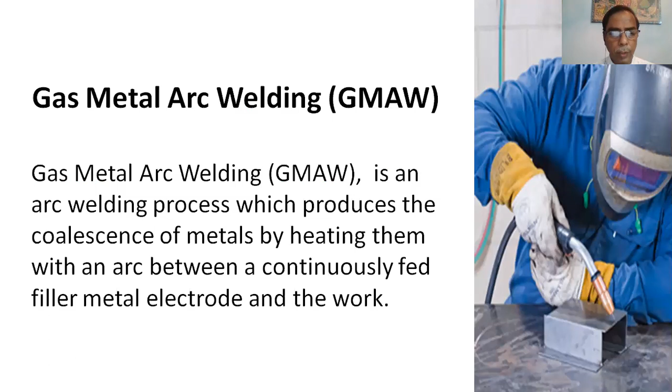Today is my sixth lecture, Gas Metal Arc Welding, GMAW. GMAW is an arc welding process which produces coalescence of metals by heating them with an arc between a continuously fed filler metal electrode and the work.

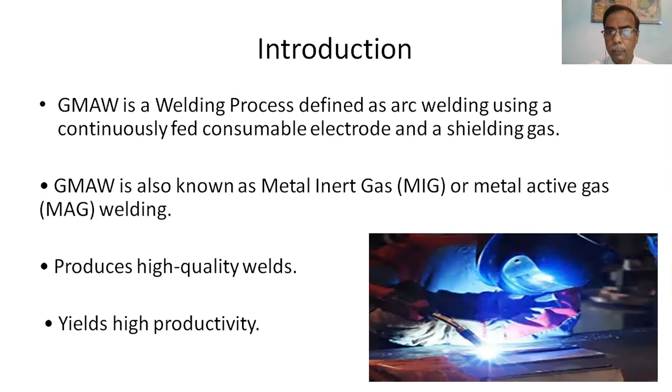Introduction. GMAW is a welding process defined as arc welding using a continuously fed consumable electrode and a shielding gas. GMAW is also known as metal inert gas or metal active gas, MAG welding. It produces high quality welds and yields high productivity. Gas metal arc welding is commonly known as MIG welding, metal inert gas welding, and less commonly as MAG welding.

In either case, the GMAW process lends itself to welding a wide range of both solid and tubular metal core electrodes. The alloy material range for GMAW includes carbon steel, stainless steel, aluminum, magnesium, copper, nickel, silicon bronze, and tubular metal core surfacing alloy. The GMAW process lends itself to semi-automatic, robotic automation, and hard automation welding applications.

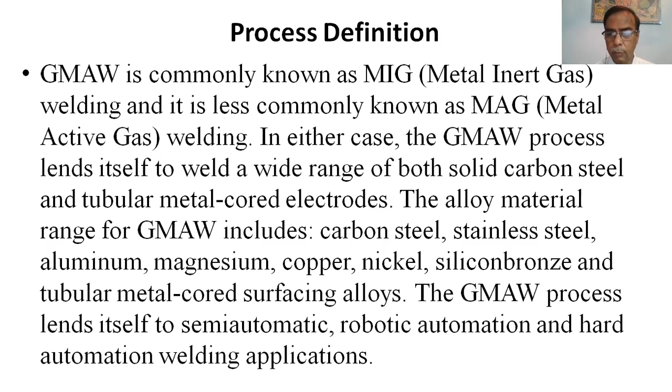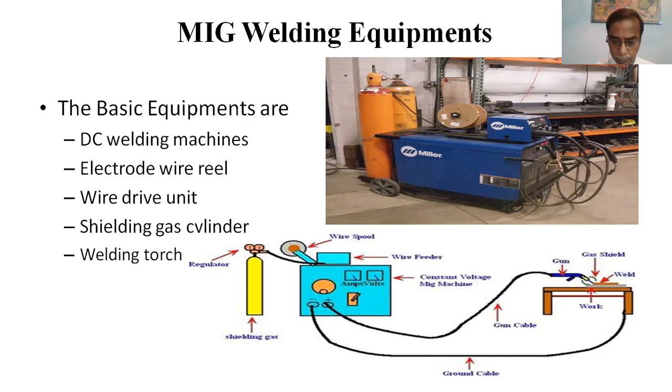Equipments: Welding gun. The typical GMAW welding gun has a number of key parts: a control switch, a contact tip, a power cable, a gas nozzle, an electrode conduit, liner, and gas hose. The control switch or trigger, when pressed, initiates the wire feed, electric power, and the shielding gas flow, causing an electric arc to strike.

Wire feed unit supplies the electrode to the work, driving it through the conduit and onto the contact tip, powered by a constant voltage power supply. As a result, any change in the arc length, which is directly related to voltage, results in a large change in the current.

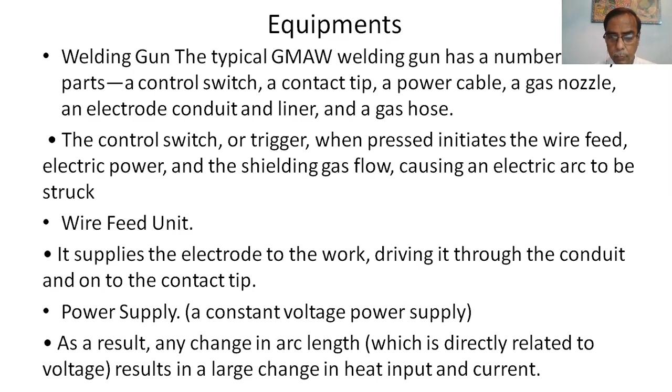Electrode selection greatly influences the mechanical properties of the weld and is a key factor of weld quality. Shielding gas: the purpose of shielding gas is to protect the weld area from contaminants in the atmosphere, that is oxygen, nitrogen, hydrogen. Gas can be inert, reactive, or a mixture of both.

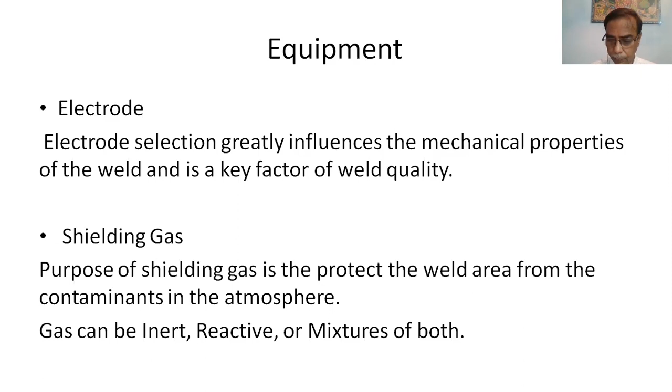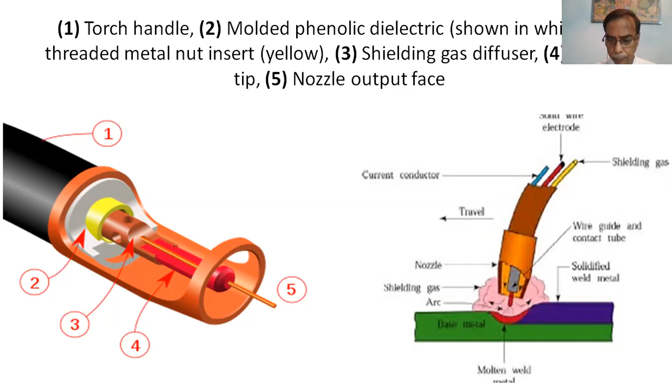Metal transfer modes: globular transfer. Welding current and wire speed are increased above maximum for short arc, with welding speed up to 110 millimeters per second, that is 250 inches per minute. Droplets of metal have a greater diameter than the wire being used. Spatter is present. It can only be used for ferrous material. Welding is most effectively done in the flat position when using globular transfer short circuit.

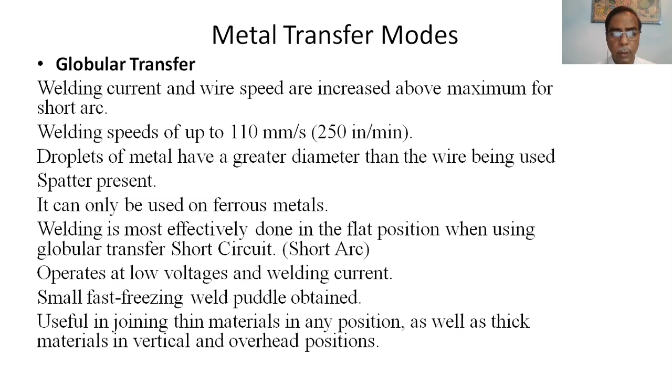Short circuit transfer operates at low voltage and welding current. A small, fast freezing weld puddle is obtained. It is useful in joining thin materials in any position, as well as thick materials in vertical and overhead positions.

Short circuit, also called short arc, operates at low voltage and welding current. A small, fast freezing weld puddle is obtained. It is useful in joining thin materials in any position, as well as thick materials in vertical and overhead positions. The weld process parameters, volts and amperes, are typically between 100 to 200 amperes at 17 to 22 volts.

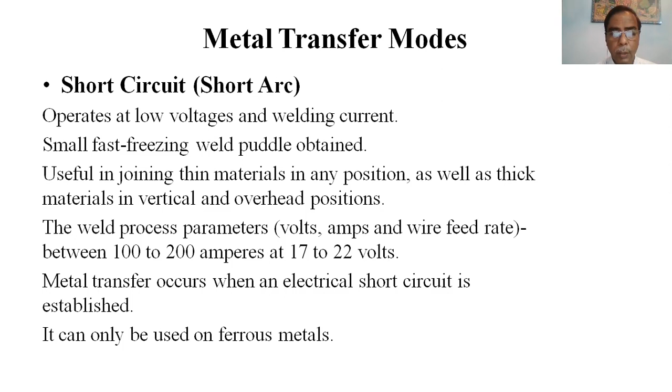Metal transfer occurs when an electrical short circuit is established. It can only be used on ferrous metal. Spray transfer occurs when the current and voltage settings are increased higher than that used for globular transfer.

Used on thick sections of base metal materials, best suited for flat positions due to the large weld puddle. Spatter is minimal to none, generally used only on workpieces of thickness above about 6.4 millimeters or 0.25 inch. The maximum deposition rate is relatively high, about 60 millimeters per second, that is 150 inches per minute. Well suited to weld aluminum and stainless steel.

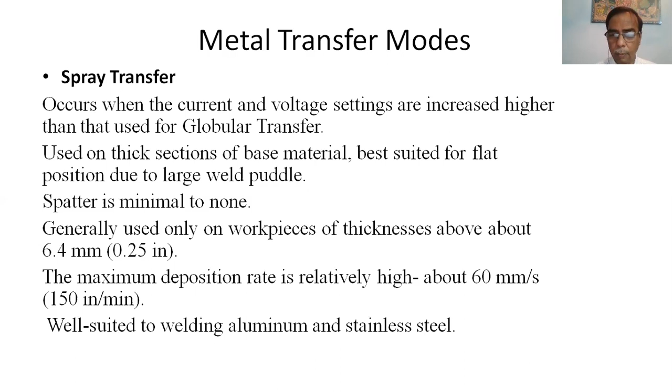Pulse spray, a variation of the spray transfer mode, uses a pulsing current to melt the filler wire and allow one small molten droplet to fall with each pulse. The pulse provides a stable arc and no spatter. Since no short circuiting takes place, a smaller weld pool gives greater versatility, making it possible to weld in all positions.

Maximum speed is 85 millimeters per second or 200 inches per minute. It requires shielding gas, primarily argon, with a low carbon dioxide concentration, and requires a special power source capable of providing current pulses with a frequency between 30 to 400 pulses per second. It requires less heat input and can be used to weld thin workpieces as well as non-ferrous materials.

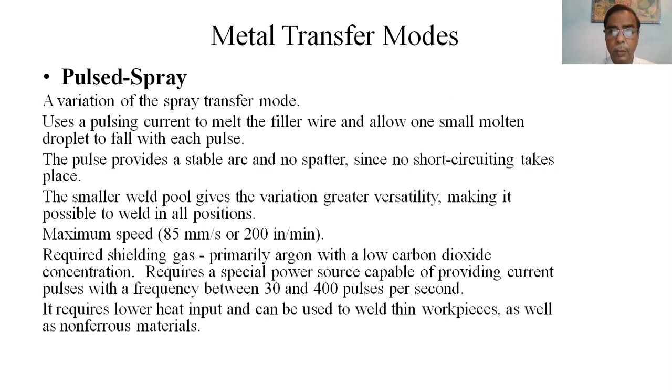Metal transfer mode: there are four modes. One is short circuit transfer, shown on the left top. Number two, on the right side, is globular transfer. Number three is spray transfer. Number four is pulse spray transfer.

In the short circuit transfer, the figure shows that before transfer, this arc is formed. During short circuit, metal is transferred, and after transfer, the figure shows it in that way.

2B is globular transfer. Globular means the droplet is much higher than the electrode diameter. The figure shows before and after.

Third is spray transfer, shown at the bottom, illustrating how spray transfer is done. Fourth is pulse spray transfer, where droplets are dropped by the spray transfer.

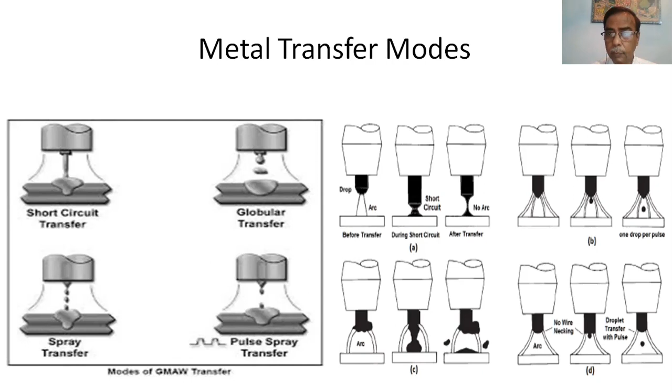Welding process groups you already know: carbon arc welding. In arc welding, there are several processes including carbon arc welding, shielded metal arc welding, and submerged arc welding, already discussed. Metal inert gas welding is what we are discussing right now. Next is tungsten arc welding, electroslag welding, plasma arc welding, etc. And resistance welding includes spot welding, flash welding, resistance butt welding, and seam welding.

Gas welding includes oxyacetylene gas welding, oxyhydrogen gas welding, and pressure gas welding. Solid state welding (SSW) includes forge welding, cold welding, friction welding, explosive welding, and ultrasonic welding. Other types of welding include thermite welding, electron beam welding, and laser beam welding.

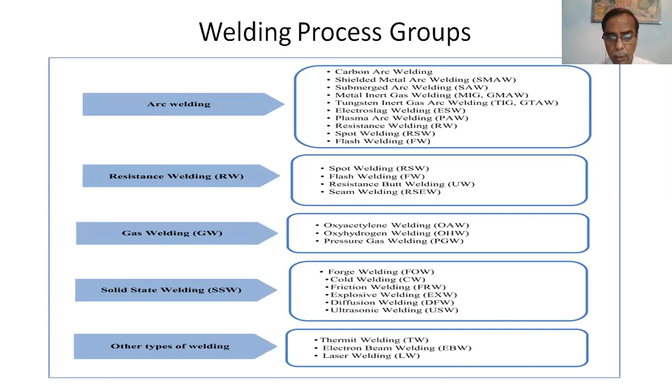The most common comparisons are SMAW (stick welding), already discussed, GMAW (gas metal arc welding), and third, gas tungsten arc welding. The figure shows how they are performed: at the bottom, stick welding, then MIG welding, and third, TIG welding.

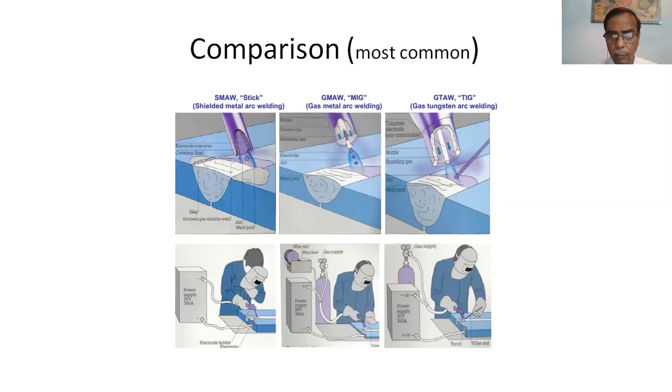Advantages of the GMAW process: it enjoys widespread use because of its ability to provide high quality welds for a wide range of ferrous and non-ferrous alloys at low price, and high productivity because it is a semi-automatic machine.

GMAW also has the following advantages: the ability to join a wide range of material types and thicknesses, simple equipment components readily available and affordable, and one given electrode size can be used on various thicknesses of materials.

Minimum post-weld cleanup and less distortion with GMAW-P pulse spray transfer mode. In pulse spray transfer mode, since the material is deposited in very low amounts, distortion is less.

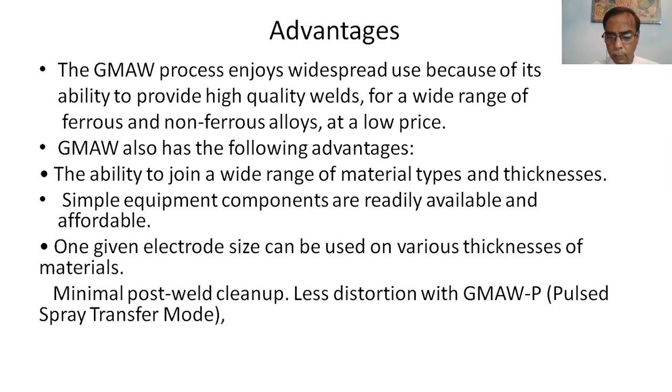Advantages include high deposition efficiency when used in certain transfer modes, no slag to chip as compared to SMAW or flux core arc welding. The process can be used on thin materials with relative ease if properly set.

Low hydrogen weld deposit with all electrodes. High production factor since no slag is required to be removed, and it uses a continuous electrode, with the parameters properly set for the application.

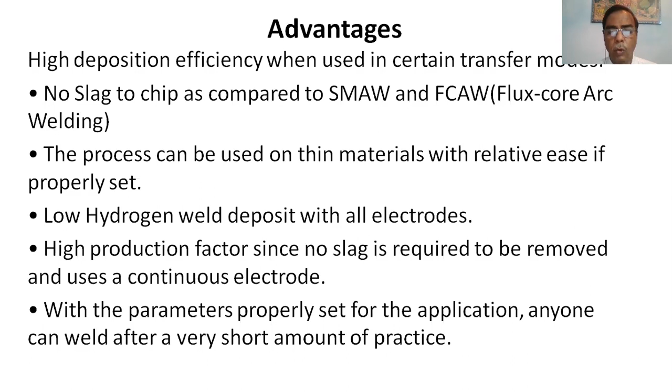Anyone can weld after a very short amount of practice. Benefits of GMAW: generally lower cost per length of weld deposit compared to other open arc welding processes.

Lower cost electrodes, less distortion with GMAW-P pulse spray transfer mode, GMAW short circuit transfer mode, and surface tension transfer mode. Handles poor fit-up with GMAW short circuit transfer mode and surface tension transfer mode.

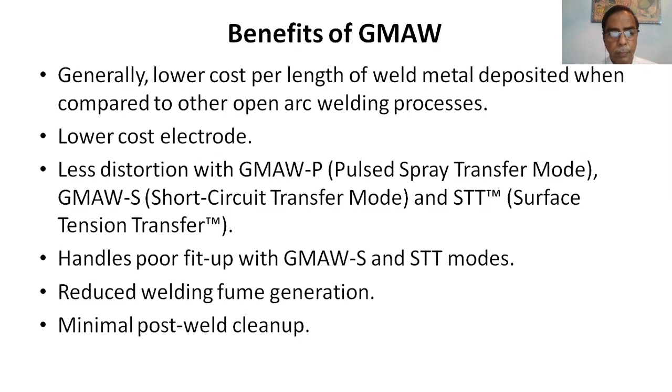Reduced welding fume generation and minimal post-weld cleanup.

Disadvantages: requires a wire feeder which is difficult to move and can sometimes be a maintenance and repair burden. Needs shielding gas, so welding in windy conditions can be difficult. No slag system, so out-of-position welds are sometimes more difficult.

Increased chance of lack of fusion if parameters and welding technique are not controlled. The gun is difficult to get into tight places. It's not suitable for windy conditions and underwater welding.

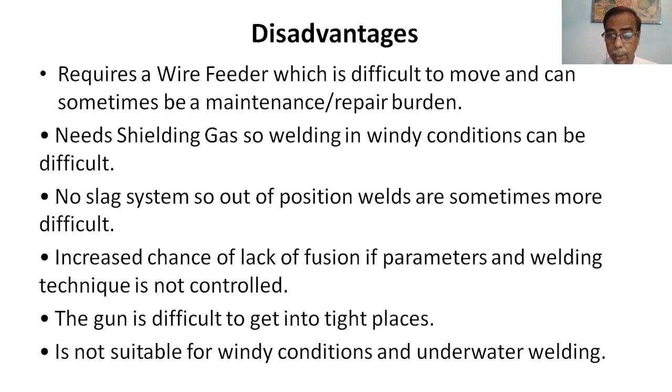Limitations of gas metal arc welding: lower heat input characteristics of short-circuiting metal transfer restrict its use to thin material. Higher heat input axial spray transfer is generally restricted to use with thicker material.

Higher heat input mode of axial spray is restricted to flat or horizontal welding positions. The use of argon-based shielding gas for axial spray and pulse spray transfer mode is more expensive than 100% carbon dioxide.

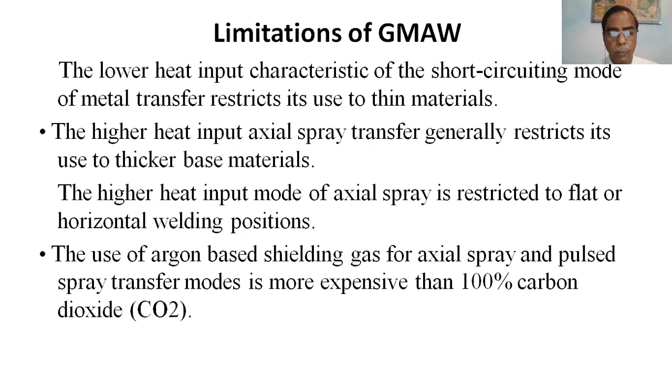Highlights: the GMAW process is generally a controlled condition. Slag porosity discontinuities are less prevalent than in other welding processes with coating.

Fusion is a concern; it's susceptible to lack of fusion due to welding procedure failure. Joint fit up, depending on location and position, can be very difficult to reach in some areas.

Welding in windy conditions is more critical due to externally supplied shielding gas. The major difference from other welding processes is the metal transfer mode, as machine and arc parameters change.

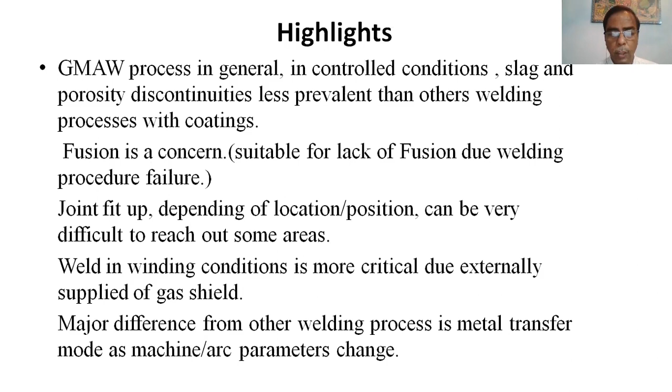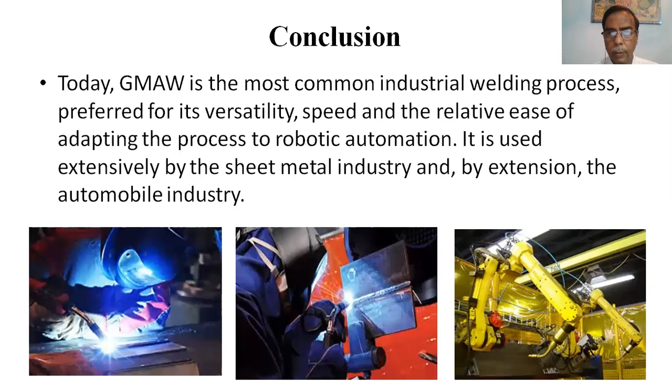Conclusions: today, GMAW is the most common industrial welding process, preferred for its versatility, speed, reliability, ease, and adaptability to robotic applications. It is used extensively by the sheet metal industry, and by extension the automobile and aerospace industries. Its productivity is high, so it is used widely in the automotive industry.